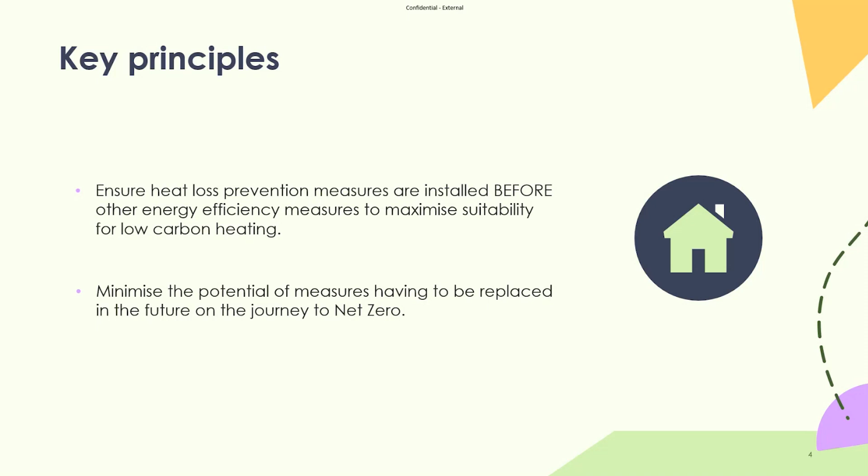And also, second point there, minimizing the potential for measures having to be replaced in the future. Generally our fabric measures do tend to have a longer lifespan than boilers and other heating appliances. The fabric measures like insulation and windows, you're looking at tens of years. Wall insulation, 25 plus, windows certainly 10 plus, and really the heating and boiler replacements are around about that, but can be shorter. So we're all thinking about how the fabric improvements and money spent on that will outlast any improvements to the heating elements of the building. So two key principles to bear in mind.

So just thinking about the net zero targets, government target of net zero by 2050. This obviously means net zero carbon, and the approach is very much thinking about how do we reduce the energy demand of our homes as much as possible, and then switching to electricity, because obviously we're getting rid of fossil fuel burning appliances, cooking and heating, and then providing that electricity as low carbon.

So those 3 points there really are the underlying approach: reducing heat losses by improving building performance of fabric, reducing other energy uses in homes through improved efficiency, and then delivering our energy from low carbon sources. So thinking about nuclear, renewable, wind, solar, and potentially wave and tidal stream as well in the future.

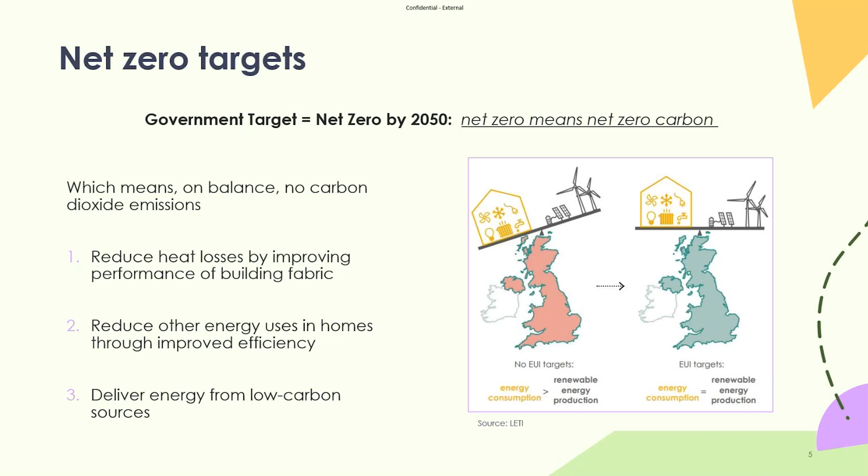So just thinking about the relative impact of homes in terms of overall carbon emissions, between 15 and 20% of the UK's carbon emissions come from energy use in the home, and our boilers account for around 60 to 65% in terms of space heating and water heating. The rest is coming from use of appliances, such as washing machines, kettles, cookers, fridges, freezers, vacuum cleaners, hair dryers. There's lots of different things in there which use power from motors or heating or cooling.

And of course, lighting, though, since the introduction and widespread availability of LEDs, that's reduced dramatically. We do have some enhanced construction standards around building regulations, which are ensuring that new buildings are increasingly energy efficient.

But the legacy building stock, around 26 million homes, so that number does vary between 28 and 25, depending what you read, has relatively poor thermal performance, and over 90% of the existing housing stock is expected to still be in use by 2050. So this really is the big area of carbon reduction which needs to be addressed.

So even if we could replace the buildings and that was seen as desirable, the cost is unaffordable, and the carbon emissions associated with that demolition and reconstruction would also be considerable.

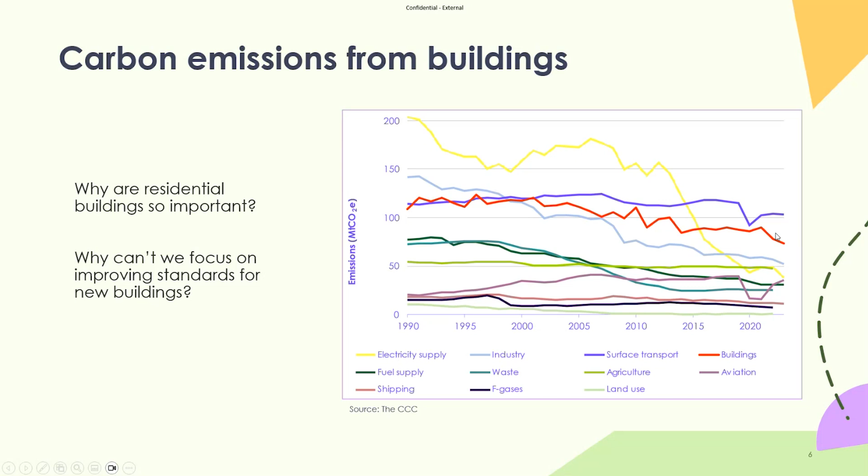And our buildings have come down a little, but again, we need to be addressing this in a much more aggressive manner. So just looking at the kind of way that heat demand has been addressed, and what it is that we're talking about.

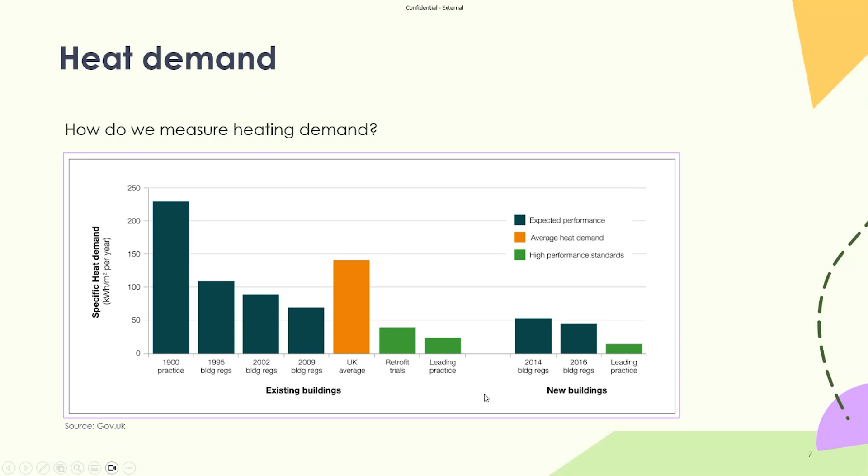Best practice, you're really talking about EnerPHit, so that's passive house retrofit standards, and that's 25, that target. If you can actually retrofit to a passive house standard, that is 15, which is down here on the right. We can see here the various upgrades of building regs more recently have been reducing this, but as we said, the impact of new build on all of this is tiny, less than 1% per year of replacement homes.

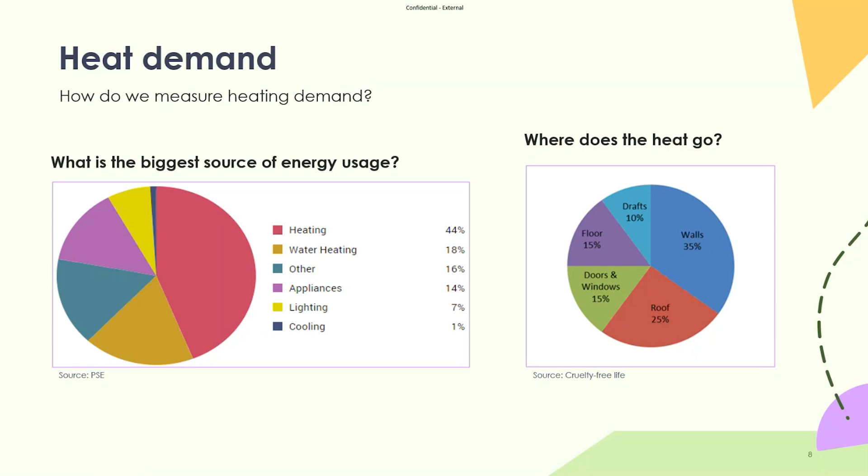Again, reiterating that you do have to do all of this with a very, very keen eye on ventilation and indoor air quality.

So just thinking about what is fabric first, it's the external envelope of the building. So whatever the scale of retrofit, a technically sound and usually cost-efficient approach is the one known as fabric first, which should always be considered when a retrofit plan is formulated. Existing building fabric should be as energy efficient as possible before spending resources on other measures.

Subsequently, because insulation measures are generally amongst the most cost effective and long lasting, as I mentioned earlier, and actually that would indicate probably the best investment, insulation is usually the most appropriate next step. Insulating the fabric also reduces the required capacity and cost of the heating system.

So if we're reducing the relative heat loss from that building envelope by 20, 30, 40, 50%, it has a big impact on the heat production of whatever heating system you're putting in. It shifts the bias away from the space heating to the hot water production as being a more important factor.

As I said earlier, the heating system usually has a shorter lifespan than the improved building fabric, typically about 15 years compared to up to 60 years for the fabric. So the dwelling might have 4 heating systems during the life of the installation.

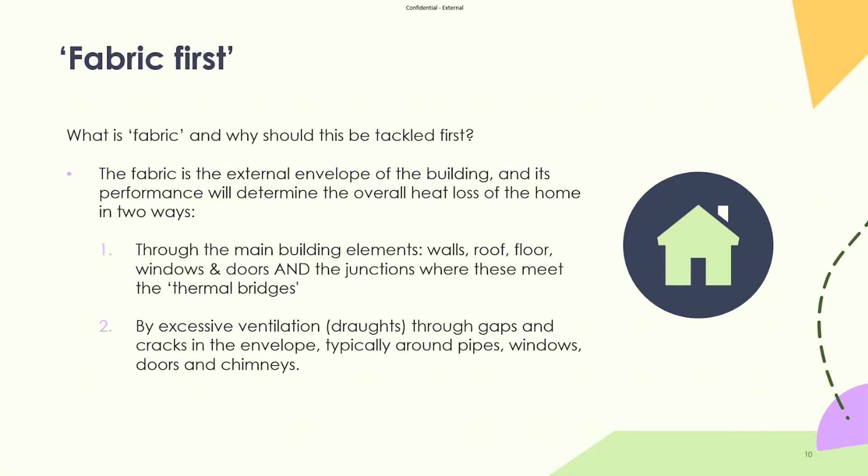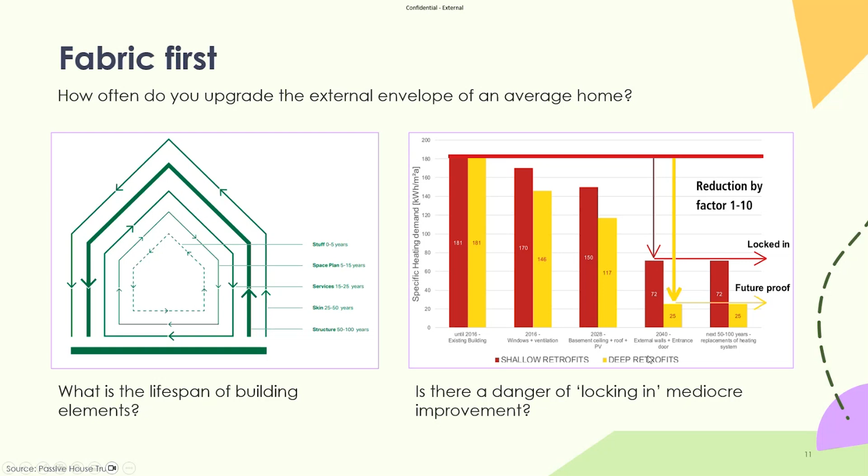So what we're thinking about here about the danger of locking in mediocre improvements is really about what I said earlier about understanding what a proper whole house retrofit plan would be, and if you're doing this incrementally, how do you understand the steps you take and in what order, so that you don't jeopardize future retrofit work? I won't go into that graph right now, but you'll be able to look at that when we share this with you.

So fabric first, it's really thinking about these elements: continuity of insulation. So there's that insulation layer around the building. Obviously, this is an external layer, external to the wall structure. Though, if it was a cavity wall, your insulation layer would be within the cavity. If it's a listed building, the insulation layer would likely be inside the wall. In a conservation area, it might be inside the wall at the front, so the frontage onto the street, and you could do external wall insulation at the back. That's called a hybrid system.

So we have continuity of insulation, no thermal bridges. So thinking about areas where you have the junction of the wall and roof, this tends to be an area where you have maximum heat loss. Sorry. And that needs to be addressed with proper detailing of the insulation. Tends to be around these corners. So you've got the floor to walls, roof to walls. Around windows, there can be cold bridging. So you need to be careful about positioning of windows, that kind of thing.

Obviously, good quality components. We're thinking about reliability over the long term, adequate ventilation. And in this case, it's got a heat recovery ventilation system. So supplying air into living areas, extracting air from cooking and washing areas, which tend to have the most elevated levels of moisture. And the heat recovery unit basically captures the heat in the waste air going out and uses that to pre-warm fresh air coming in. And on this we're talking night purge ventilation, which is basically at night when temperatures are acceptable.

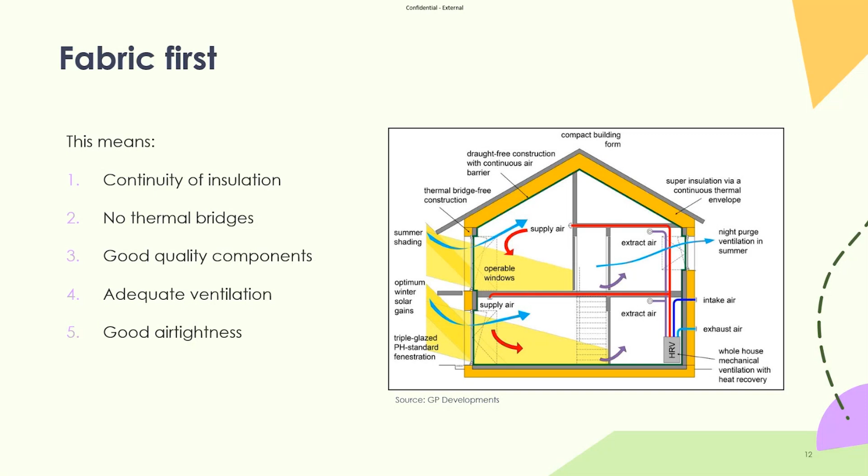So the scope of works for Fabric First really is kind of a summary of the things we've looked at, but also with things like windows and insulated walls, you do need to be very aware of, and this is down to the retrofit designer, positioning of those windows within the insulation layer. So if you do have a windows program going on and then you're going to do EWI, it's best to do them at the same time if it's possible, because you need to be able to move the windows into the insulation layer in order to really minimize the cold bridging.

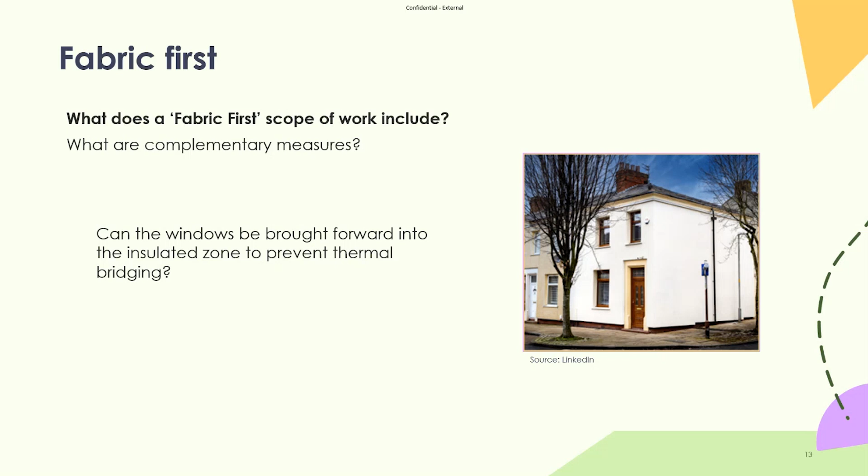You can get some very interesting heat loss pathways around windows, as I said, if the insulation is all on the outside and actually it provides a pathway right round the window, the whole window frame, unless you have careful detailing of the insulation.

No regrets. Really thinking about that kind of retrofit strategy, and these points, I suppose, do summarize the risks or regrets. So unplanned improvements can result in current retrofit measures being removed to enable future upgrades. So that's why I was saying don't do things now which will later hinder further retrofit work.

Unplanned improvement can result in inadequate ventilation and/or cold spots, thereby increasing the risk of condensation, mold growth, and reduced air quality. Absolutely, your cold bridging, cold spots can be a magnet for condensation, especially if you've reduced the background ventilation and haven't provided adequate ventilation after the retrofit. You've still got all your moisture in the air and it just is drawn to all the cold bridged areas, and you get some pretty shocking mold growth in those areas if you're not careful.

Unplanned improvements can lock in mediocre outcomes, making future decarbonisation more difficult. Again, without planning this properly, you can end up creating all sorts of unwelcome, unplanned other impacts, unforeseen consequences, really, which is that you suddenly end up with a bigger problem than maybe you had before,

which might mean having to move people out of a home to remedy that, and suddenly you're having to spend a lot more money on works which you hadn't anticipated in order to sort out problems that have happened because of this unplanned improvement process. It needs to be carefully thought through if you're going to avoid that kind of thing.

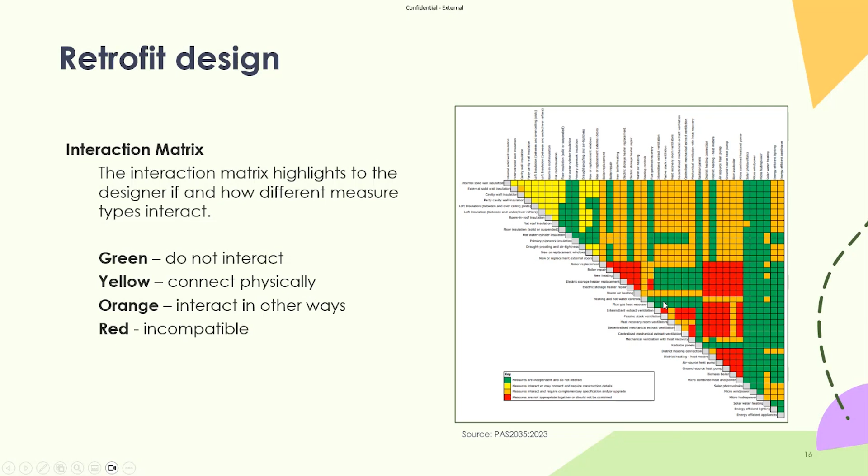Where you have yellow, that's where they're connected physically. Orange, they can interact in other ways, and red, they are incompatible. So it's a quick indication, when people are considering certain measures in here, to not consider putting them together if they're on red. And amber and yellow generally are to proceed with caution, really.

However, retrofit evaluation should have a degree of independence in order to provide a truly objective view of overall project performance. But for instance, if someone was a qualified architect with good experience around buildings, they might easily qualify as a retrofit coordinator. They'd certainly be a retrofit designer. They'd certainly probably understand retrofit assessment.

So the retrofit coordinator is a kind of project manager for the project, but it's really from the start to the finish, and their responsibility does begin really from the outset, and they would appoint the retrofit assessor to do that first piece of work around a survey of the home, assessing its suitability for retrofit, finding any underlying issues, etc. But the retrofit coordinator really has responsibility all the way through.

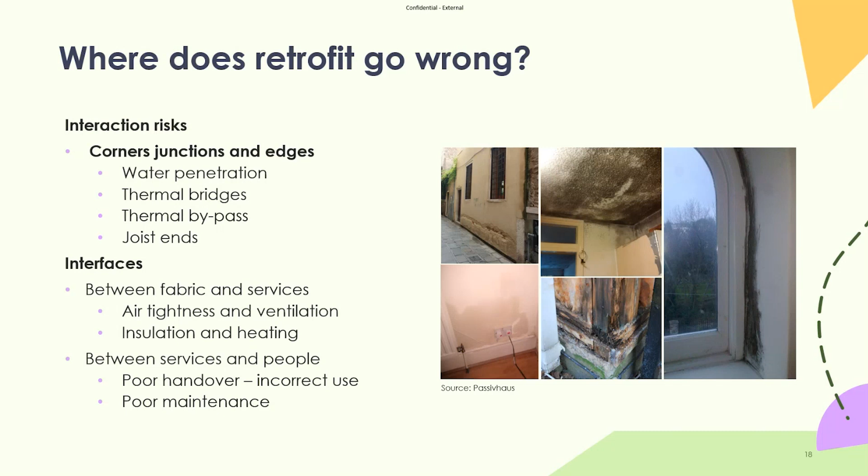The other problem is poor maintenance. So if maybe filters need to be changed or certain elements need to be cleaned and regularly serviced, then that can make a big issue on the performance. So again, thinking about the no regrets elements, the importance of accurate measurement. So this is really to do with understanding energy use.

And actually, we do hear about SAP and, particularly RdSAP, being a difficult thing to base energy use on. RdSAP is really an energy model which is used to generate EPCs, and it makes certain assumptions along the way, and these might not reflect the real performance of a dwelling with a particular level of occupancy. So that's all to do with preferences for indoor temperature, preferences for amounts of cooking, amounts of washing per week, etc.

So we need to understand how much moisture is being potentially generated into the indoor space through cooking, washing, occupancy levels. These all affect the levels of humidity, and really they dictate the levels of ventilation performance that you need in order to maintain good quality indoor air, and not have this risk of extremely high levels of moisture, humidity in the air, which are a risk in terms of condensation and mold.

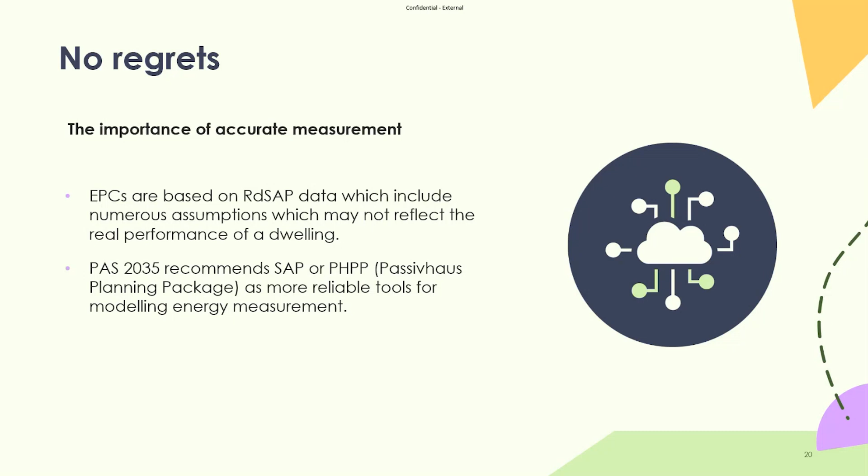And that second point is really thinking about accurate energy modeling. So PAS recommends SAP, full SAP, or PHPP, which is the Passivhaus Planning Package, as better tools to use for the energy modeling. So just a brief word about worst first.

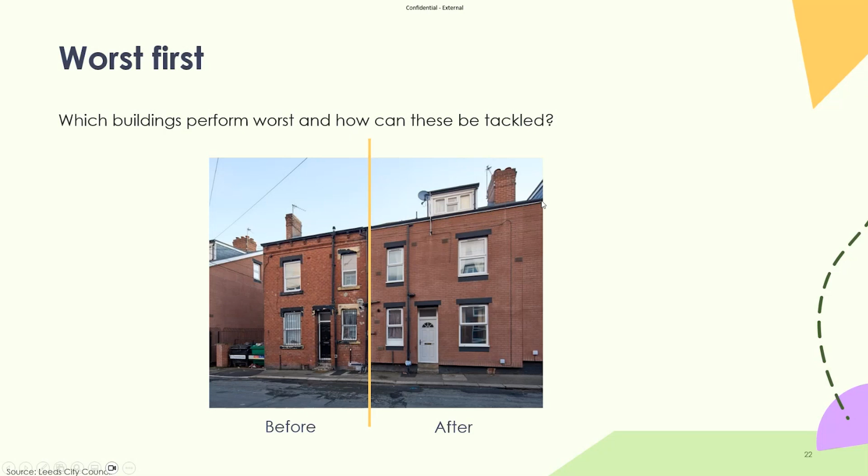I can't really tell from the detailing the roof line there, but obviously that would need some good detailing between the roof and the top of the external wall insulation layer in order to minimize the risk of water ingress, water getting behind that insulation layer. You can see that white line here. Looks like some kind of finish, some kind of flashing along the top of that insulation layer.

Oops, didn't mean to do that.